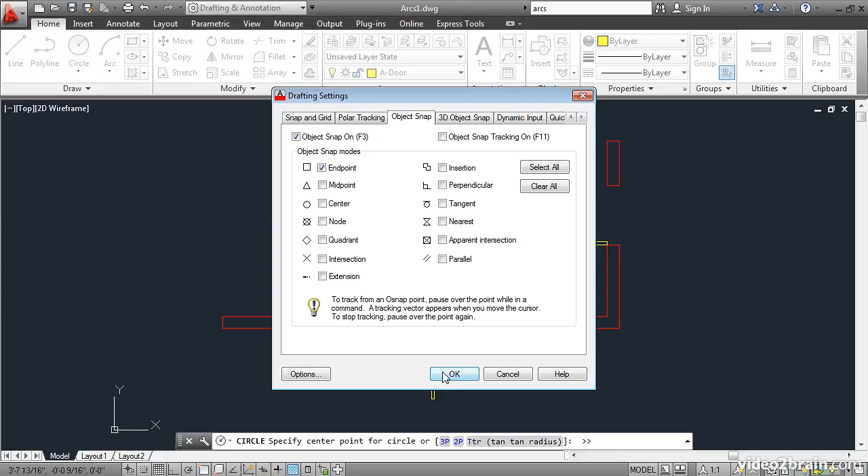Now, I'll position the cursor over the hinge point of the door and click to specify the center point for the circle. Then I'll come up here and position the cursor right on the end of the door. I'll click a second time to specify the radius of the circle.

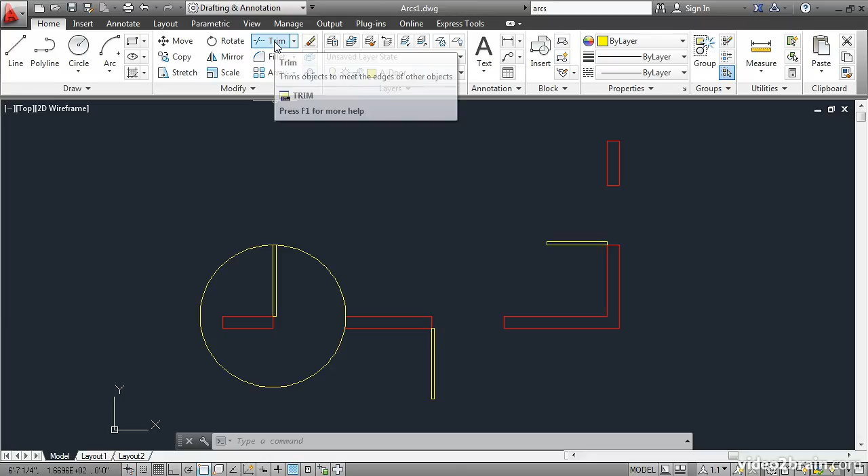Next, click the Trim command on the Modify panel. On the command line it says Select Objects or Select All. The first part of the Trim command requires that you choose which objects will be cutting edges, and in this case, I'll just press Enter to select the default option, Select All. So all the objects can act as cutting edges.

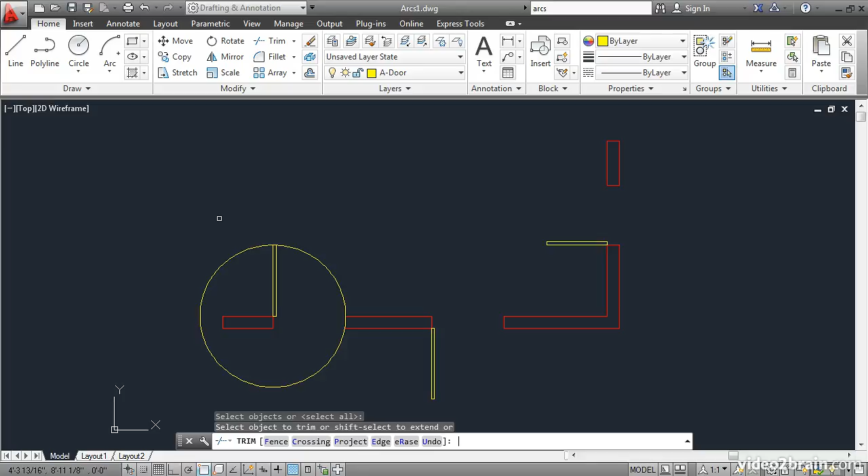Now I'll click this portion of the circle to trim it away. We're left with an arc. I'll press Enter to complete the command. Just to make sure that this truly is an arc, let's turn on Quick Properties, and then click on the arc without issuing a command.

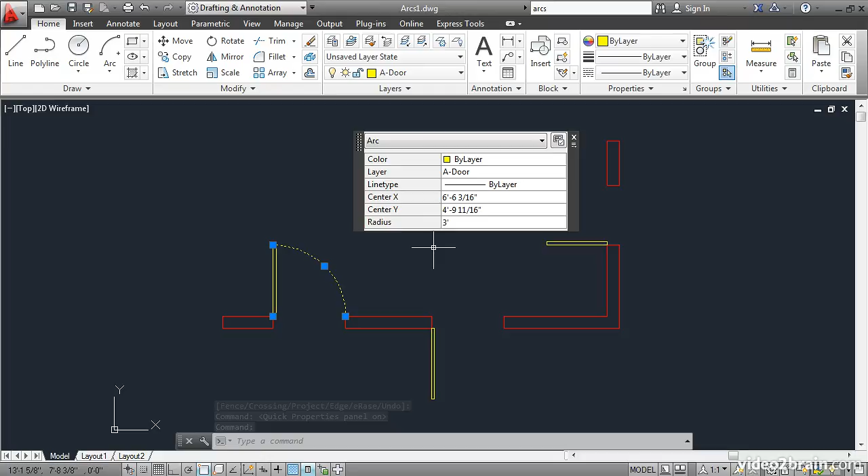It says right here it's an arc, and it gives the properties of that arc. It has a radius of 3 feet, which apparently is the opening in the wall and the size of the door. I'll press Escape to deselect the object and close Quick Properties.

This time, let's use a specialized arc command to draw the second door swing. I'll open the flyout, and you can see that there are many options here. Some of these options have the same items, like Start, Center, End. Down here it says Center, Start, End. So they're just in a different order. It's really a matter of personal preference which one you use.

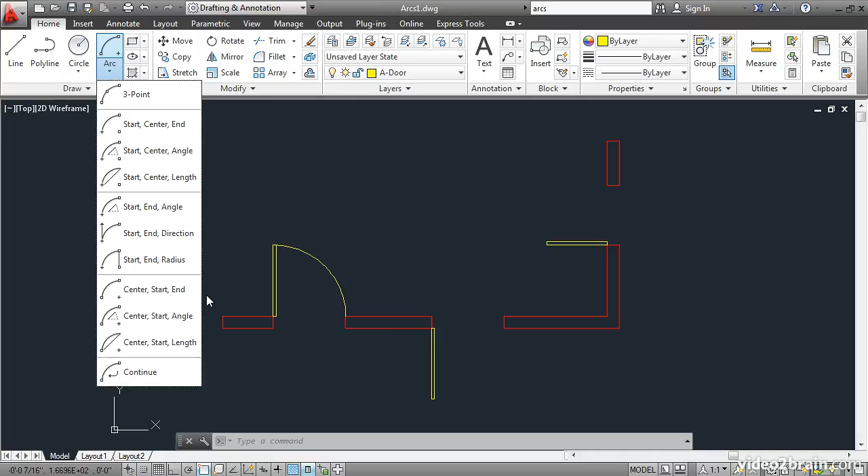In this case, I think I'd like to specify the center point first, and then the start of the arc and the end of the arc. So I'll click here, and then the command line says Specify Center Point of Arc. I'll come over here and click this hinge point, and then the start point could be here or it could be here.

But it has to be on the door because the default option for arcs is to create the arcs in a counterclockwise fashion. So if I click here, you'll see that as I move the cursor, the arc is swinging out counterclockwise from the start point. I'll click here to end the arc, and the command is completed.

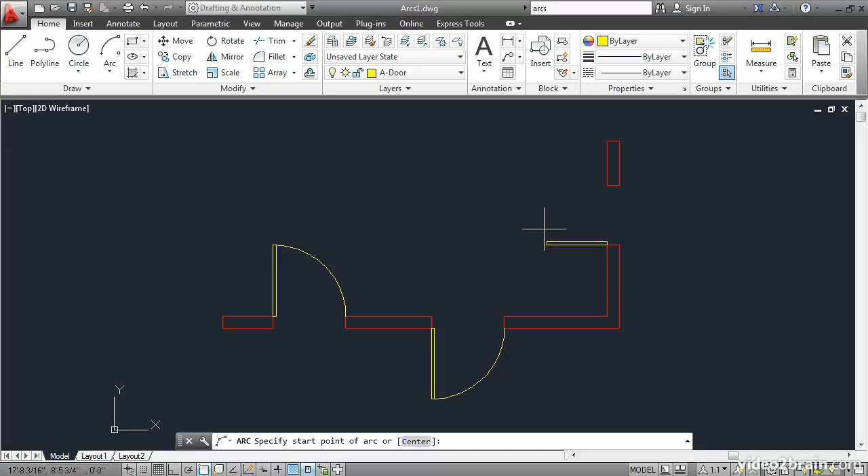Let's try that again. This time, I'll use this method, Start, Center, End. If I choose the start point here, we're going to have a problem that you'll see. I'll click here, and then it asks for the center point. I'll click here, and then the end point here.

You see the problem? The arc is created in a counterclockwise fashion from start to end points. Because I chose this as the start point, I ended up with this problem. So let's erase that. I'll click the Erase tool, select the object, and right-click to Enter and complete the command. Let's try that again. Start, Center, End. So the start would be here, the center is here, and the end is here.

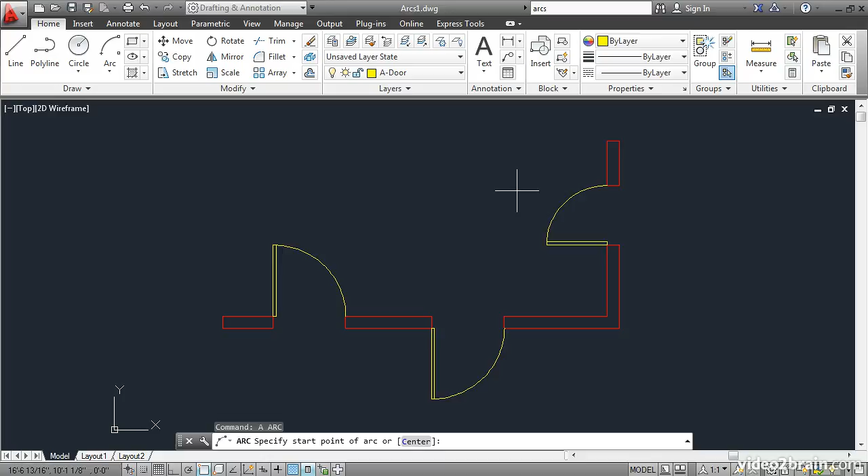That method worked pretty well for creating door swings, but there are occasions where you want to create curvilinear walls or curved items, and to do this you can string a series of arcs together. I'll type A, Enter, to execute the arc command. The default method is to click 3 points, the start point, the second point, and the end point.

If you press Enter and repeat the arc command, and then press Enter again, the arc will continue on from the last one, and the second arc will be tangent to the first, so that there's a nice curvature where the arcs meet. I'll press Enter to repeat arc, Enter again to continue, and in this way I can create a nice curvilinear form without any discontinuities or kinks between the arcs.

You can edit arcs by clicking on them without issuing a command, and I'll turn off Quick Properties to get it out of the way. The grips are these blue squares, and they represent the key points of the arc, the start, midpoint, and end of the arc, and the center point.

I'll hover the cursor over this grip, and I see a little menu that appears. This is called a multifunctional grip. It says Stretch or Radius. I'll choose Stretch, and you can see what I can do here with this grip. I can stretch its midpoint, and the start and end points stay where they are.

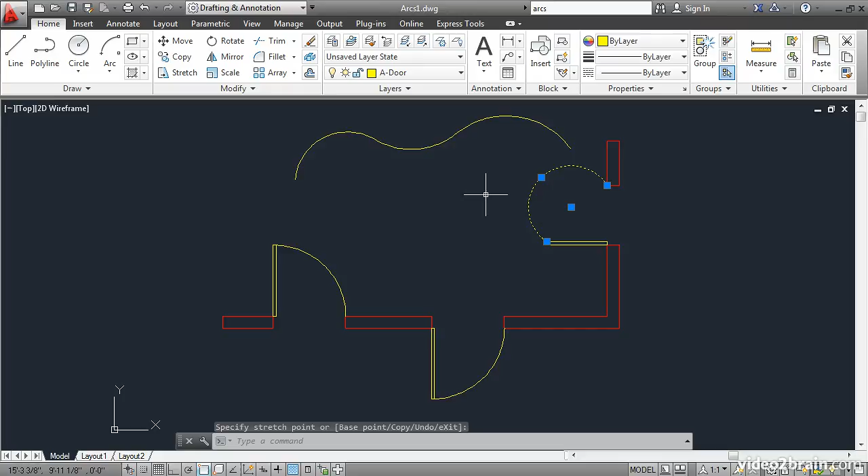But the center moves, because remember, arcs are always portions of circles, so if you change the curvature, it makes sense that the center point would move. You can alternatively change the radius of an arc, and that makes a concentric portion of a circle. You can also stretch or lengthen an arc by selecting one of its endpoints. And in this way, you can reshape arcs very easily. You now have some practical experience creating arcs and are aware of their creation options.